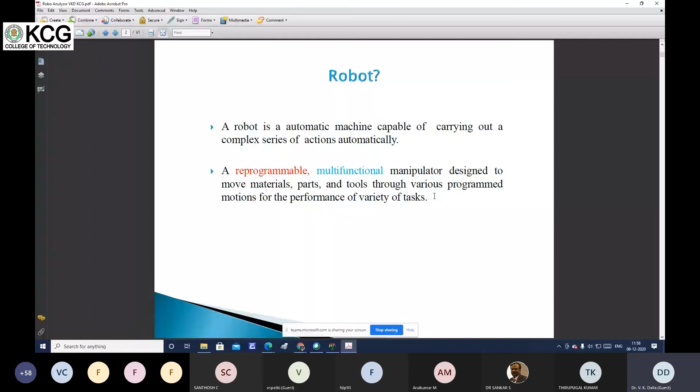Now, a little bit about the history of the term robot. The initial term was robota, taken from the Czech word meaning forced or slave labor. It was introduced in 1921 by Karel Čapek, a Czech playwright, in his drama named Rossum's Universal Robot, RUR. In this drama, the word robota was coined, and from there the evolution of the term robot began.

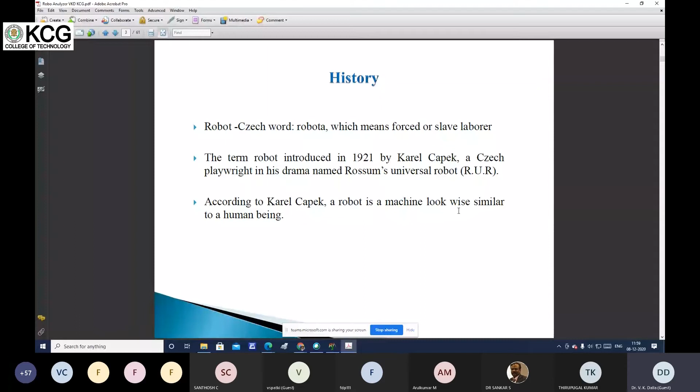According to Karel Čapek, a robot is a machine similar in look to a human being. There are three H's in robotics: hand, head, and heart. If we compare a robot with human beings, the hand is in the form of a manipulator, the head represents the intelligence part, and the heart represents the emotions of human beings.

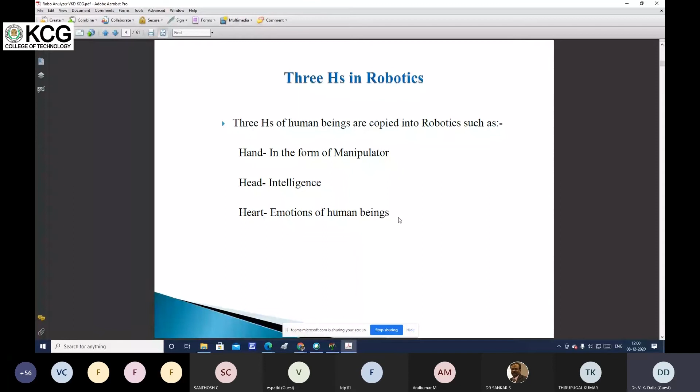What about safety? Human beings come first. A robot may not injure a human being, or through inaction allow a human being to come to harm, unless this would violate a higher order law. A robot must not cause harm to human beings under any circumstances.

What about the second law? It's regarding obeying instructions given by human beings. Under any circumstances, a robot must follow the instructions given by humans, but not in a way that violates the first law. Safety is the first concern.

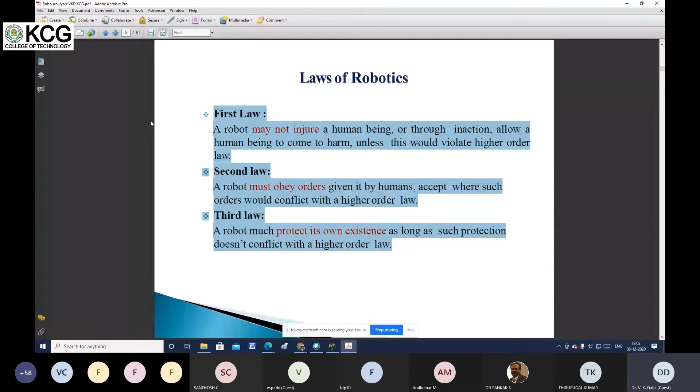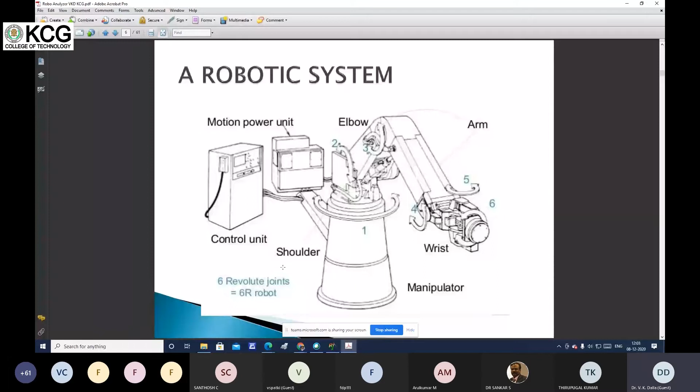Now I'm moving a little bit to kinematics, and the software RoboAnalyzer is for exposure to kinematics. In robot manipulator kinematics, it is written here as robot then manipulator, but in some books you will find it written simply as robot or as manipulator. Here it is written as robot manipulator, so there is almost no difference in some books.

In a book written by Professor S.K. Saha of IIT Delhi, manipulator is defined as the mechanical structure of the robot. So these two terms, robot and manipulator, are interchangeable.

What about kinematics? In kinematics, we only study the motions without considering the forces. The forces are the cause of the motion—forces in the case of linear motion, and torques in the case of angular motion. So in kinematics we study only positions, velocities, and accelerations. We don't study the forces required to move the manipulator, or the torques required to rotate the joints.

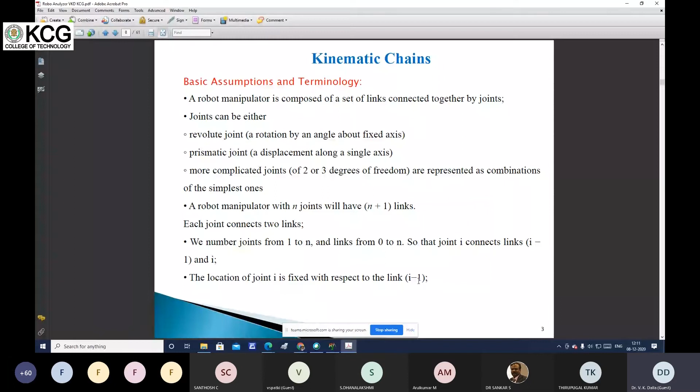That is. What about forward and inverse kinematics? We will visualize this by using the software Robo Analyzer, but we should know the basics of forward and inverse kinematics. So forward kinematics is where the values of the joint angles will be given, and what we have to evaluate is the robot tip positions. So in this, suppose the values θ1, θ2, θ3 will be given.

Suppose θ1 is 20, θ2 is 40 degrees, and θ3 is minus 30 degrees, like that. So these are the inputs. The joint angles are the inputs, and what will be the outputs? So our robot tip, this end effector. End effector either may be a gripper or tool. Here it is a tool. So these positions of the tool are the outputs in the case of forward kinematics.

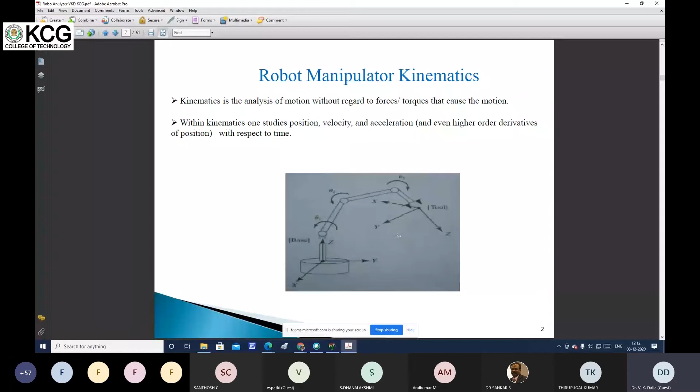What about in the case of inverse kinematics? In inverse kinematics, the output of the forward kinematics then becomes the inputs. And what were the outputs? The outputs were the robot tip positions. So robot tip positions, meaning x, y, z coordinates, will be the inputs here. And what will be the outputs here? The joint angles will be the outputs.

So what does it mean? To locate any object at a particular goal point, there may be possibilities of having more number of sets of the joints. In one set, all theta 1, theta 2, theta 3 will have some values. In another set, it will have some other values. Either all will have different values, or some angles will have different values.

So this is more practical. Inverse kinematics are more practical. Suppose I'm going to drink water. For that, this is my target point. So there may be multiple ways. Like I can grasp this like this way, I can grasp this like this way, I can go and handle this bottle like this way, meaning exactly. So this is more practical, just to drink water.

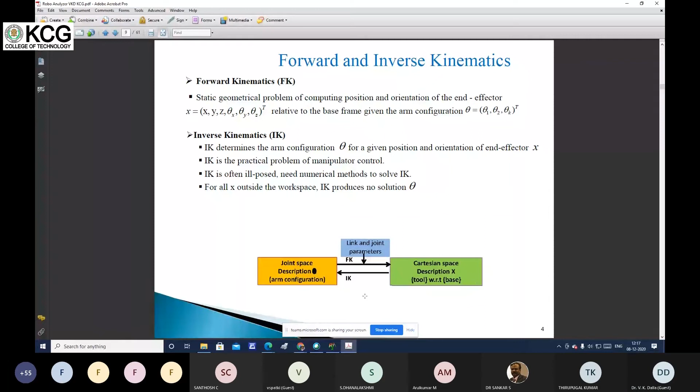This is the schematic diagram of robots. We are taking the example of planar robots because it is easier to understand; 3D may be difficult. Here is a 3 degree of freedom robot, and in robotics, firstly we should know what degrees of freedom means. Degrees of freedom means the number of independent variables which can completely describe the system.

The system here is the robot. In robotics, each joint is considered 1 degree of freedom. So how many joints are there? Theta 1, theta 2, theta 3. So we have 3 joints, meaning 3 degrees of freedom. A planar robot arm means we are only considering X and Y; the thickness of the robot we are not considering here, just for understanding.

As I told you, to give numbers we need to name all the links and all the joints. For links, we start from 0: link 0, then link 1, link 2, link 3. But what about the joints? Joints we start from 1, not from 0: joint 1, joint 2, joint 3, like that.

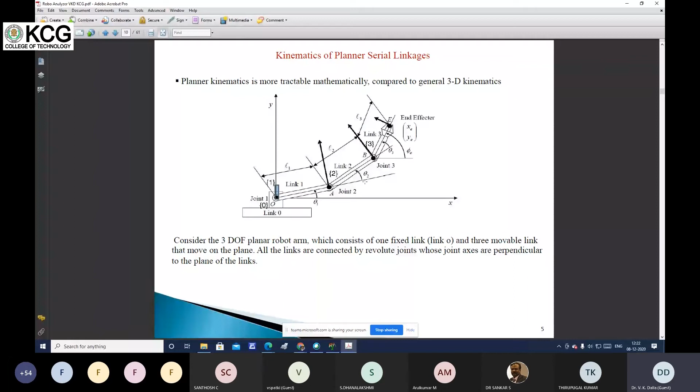Similarly for the x direction, we can get the equations where sin is replaced by cos. So it will be L1 cos theta 1 plus L2 cos(theta 1 plus theta 2), and so on.

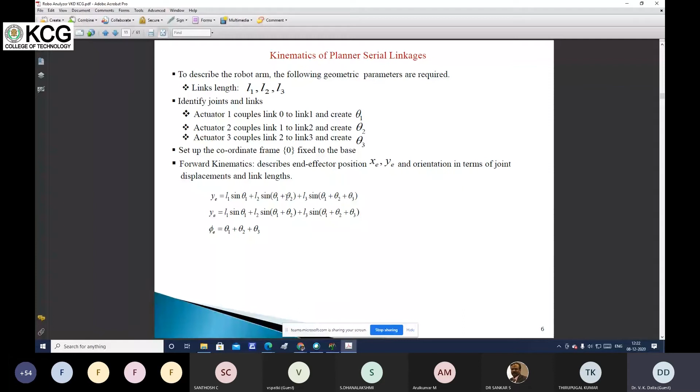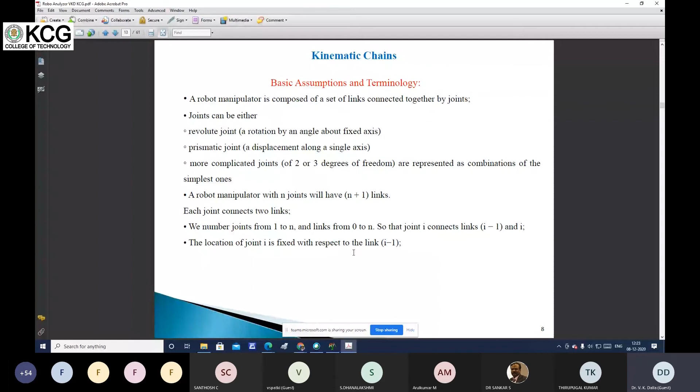This is only possible if we have extra degrees of freedom. If a robot has various configurations, meaning various ways to reach the goal points, then the robot is called a redundant robot. Redundancy is only possible if there are extra degrees of freedom. Our human body is the best example of a redundant arm - we have a number of extra joints, that's why we are more flexible and more capable.

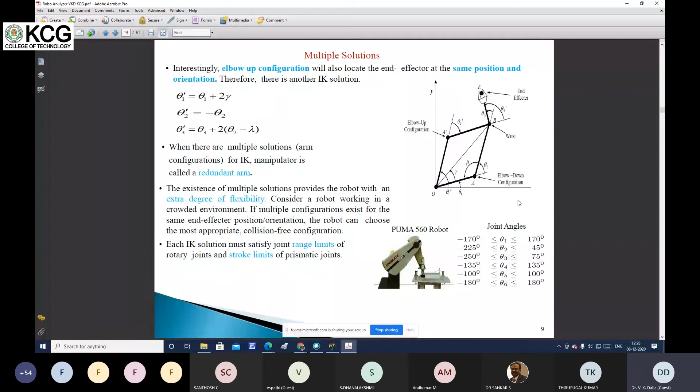Now, quickly, I'm moving to the DH parameters - better we cover this one, then come back to the previous slide. DH, the full form is Denavit-Hartenberg parameters - 4 DH parameters. And what are these parameters? These are alpha, A, D, theta. Alpha is the twist angle. A is the link length, like L1.

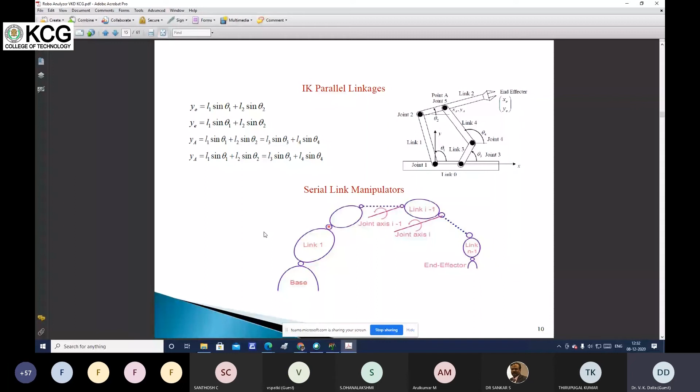Then likewise we cannot get the kinematic and dynamic equations easily for motions. With the help of computer science, those kinematic and dynamic equations are converted into the language of robots, the language of machines. But the basic thing, from where the codes come, is the kinematics and the dynamics. For a complex system or robot having multiple degrees of freedom and a combination of prismatic and rotary joints, we cannot easily get the kinematic and the dynamic equations.

The DH parameter is restricted to kinematics only. So ultimately why is it required, and how? This is the link description. For example, axis I minus 1 and axis I - this is the present axis and this is the previous axis. In between there will be a link.

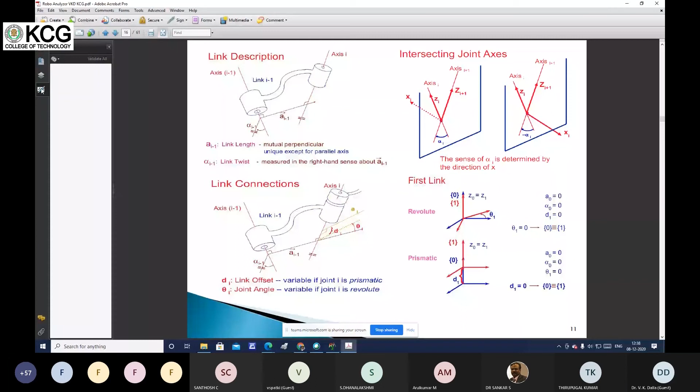This is the xi minus 1 axis, this is the xi axis - we want to make it parallel. So again we need to rotate the axis about some axis - by how much? By theta. Now it got oriented, but there is still some distance to reach, along the axis. Then we need to consider the prismatic joint, meaning D.

Ultimately the point starts from here and will reach here. So how many transformations are there? There are 4 transformations - firstly the twisting, second is translation. Twisting is a rotation, then translation, then again rotation, then again translation. But this translation is along the manipulator axis.

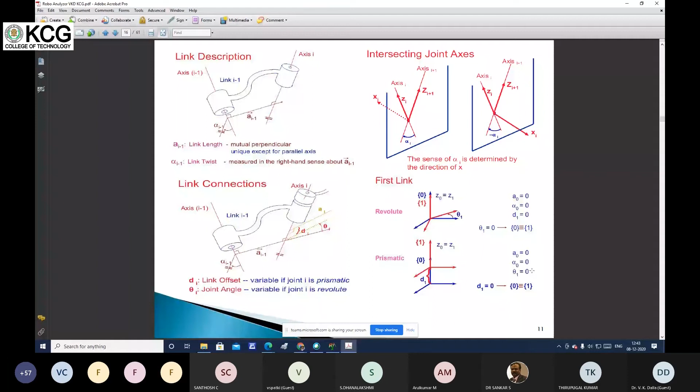Now let's consider the last link, with the same revolute and prismatic joints. See both axes - this is the previous axis, and this is the present axis. In between there is link length along the x-axis - that's xn minus 1 for this axis, and xn for this one. So what is the difference here? This xn got rotated by theta n. Similarly for the prismatic joint.

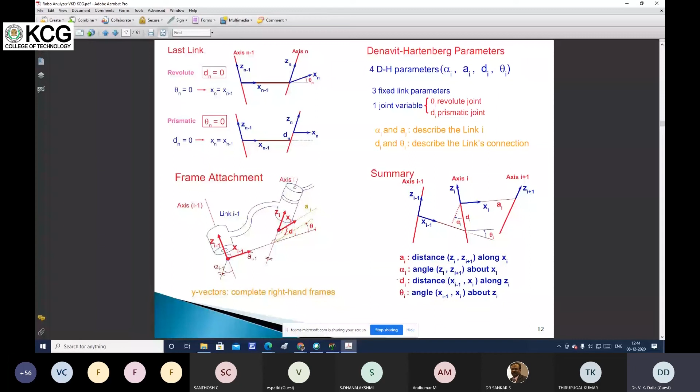So ultimately, why are we doing this? Our purpose is to get the positions of the robot tips. We want to locate objects accurately at the defined points, at the goal set points. For that we want to analyze - that analyzing we are going to do here. So ultimately, with the help of all 4 configurations, we get this. See here, this transformation is for one, this is for another, this is third, this is fourth. There will be 4 matrices, and we need to multiply all matrices, then we will know about the robot tip positions and orientation.

So this fourth column - the 3 elements will denote the robot tip positions. This a I minus 1 is equal to x, this one is equal to y, and this is equal to z. What about this 3 by 3 matrix? This is the rotation matrix - it tells the information about the orientation of the manipulator.

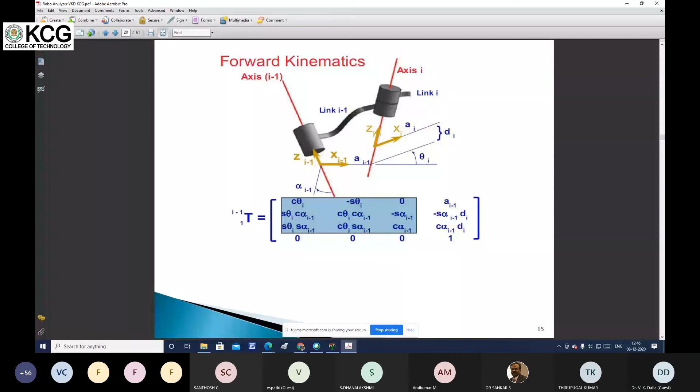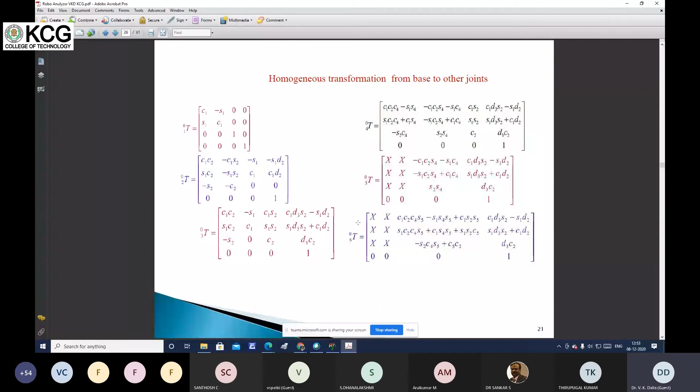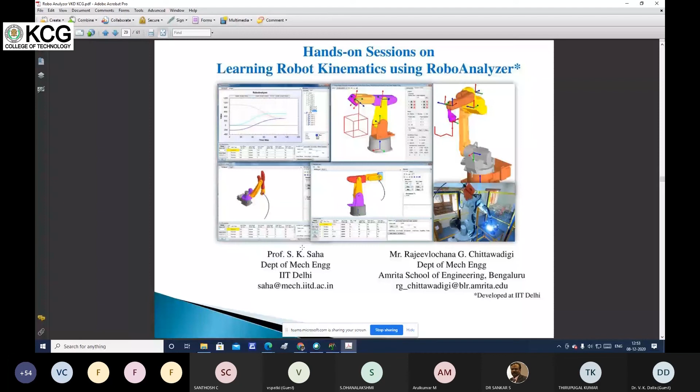Now coming to the Robo Analyzer part, the software is developed by Professor S.K. Saha and his team. What are the important contents? It is for robotics education: homogeneous transformation matrix, 4 by 4 matrix, DH parameters, forward kinematics, inverse kinematics, motion planning.

What are the applications? Applications are not only limited to industrial use now. It can be used in industries, academics, research, entertainment, like the robot movie of Rajnikant, part 1 and part 2, and for medical applications. And now it is being included in the UG syllabus.

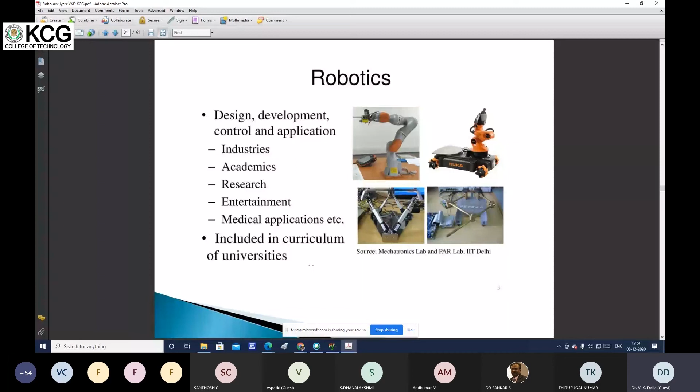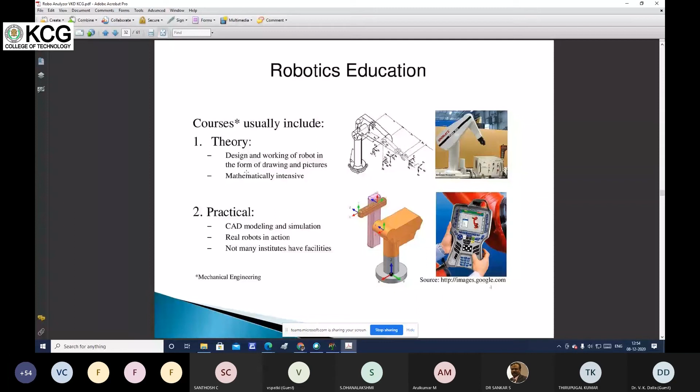Their courses are being included, theories and practicals. Why not switch to the software now? So, it is a priceless software, meaning freely we can access and download it.

How, from where can we download it? Go to Google, type Robo Analyzer, then it comes up. The website is www.roboanalyzer.com. If you click, a window comes up.

Now see the left part, here, Home. What is this? Robo Analyzer is a 3D model based software that can be used to teach and learn robotics concepts. It is an evolving product developed in the Mechatronics Lab, Department of Mechanical Engineering at IIT Delhi.

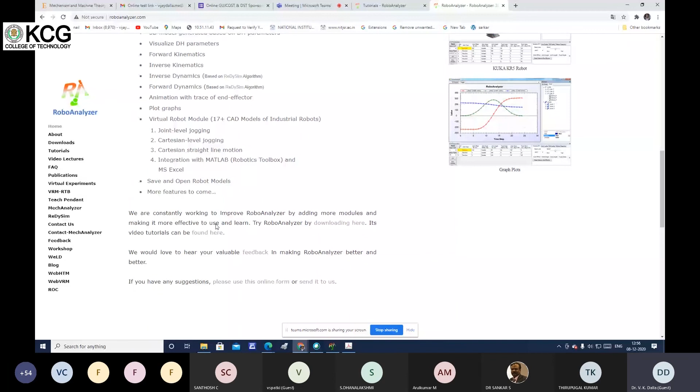So a little bit about its features. There are a number of versions that can be seen by clicking downloads. See the version, now the latest version is V7.5.

What are the system requirements? These are the system requirements. By having these kinds of specifications, you can use this software. You can easily download it, and these are the features added in the new versions. In this version, the homogeneous transformation matrix module is added.

There are some tutorials, video lectures, frequently asked questions, publications, virtual experiments, and some mechanical analyzer. There are some more softwares by clicking this: dynamic, ReDySim, Mech Analyzer. This Robo Analyzer is only for robotics, and Mech Analyzer here is for some mechanism portion.

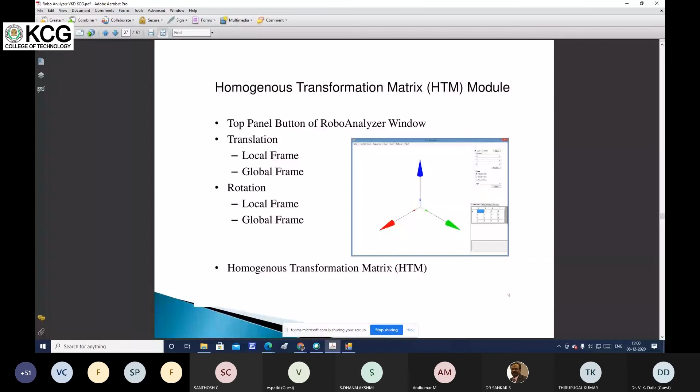This panel, the top panel, this window comes in this Robo Analyzer software. See the last column is for the coordinate systems, in x, y, z directions.

Okay, now rotations. This 3 by 3 matrix shows the rotation.

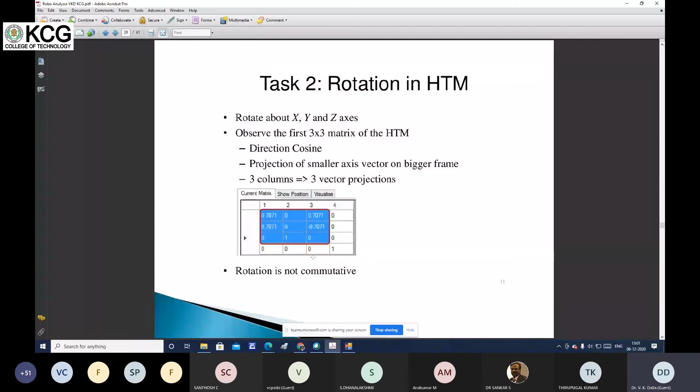Now the difference between local versus global in HTM. So current transformation, what does it mean? Current transformation is the multiplication of individual matrices.

But local transformations, what we have to do means: this is our absolute frame, and this is my mobile frame. Suppose there is a local frame. Whatever transformation will be there in the local, what we have to do? We need a number of matrices, but we need to multiply them in a sequence. Suppose after this, whatever transformation happens, we have to post-multiply.

But in the global, what we have to do? If we consider the previous absolute frame, then we need to pre-multiply.

Similarly, rotations also we can see by rotating. Suppose on the x-axis, I'm putting values, 10 degrees. Suppose I'm putting larger values, 50. Now see the rotation about the x-axis, and this is our x-axis.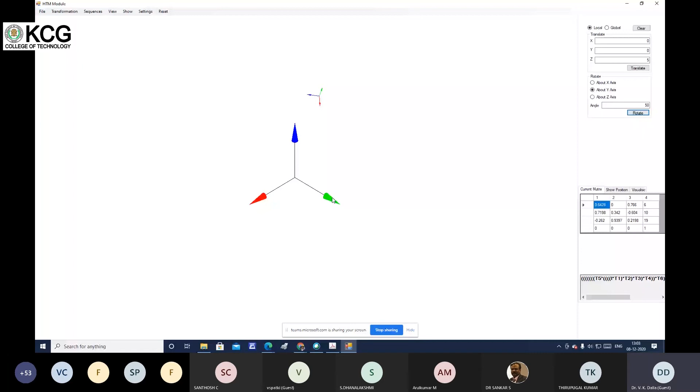Now rotation about the y-axis. See, rotation about y-axis, this one in green color. And rotation about z-axis: now this z-axis is fixed, and the rotation is about that axis, while the other axes are being rotated.

See, you might be observing changes in these matrices. If you change values of x, y, z in Cartesian space, the values in the last column will change. If you change the joint angle values, the rotation matrix and positions will change. One can observe this. Suppose I'm putting x some values, suppose 30. Now what are the changes happening in this matrix?

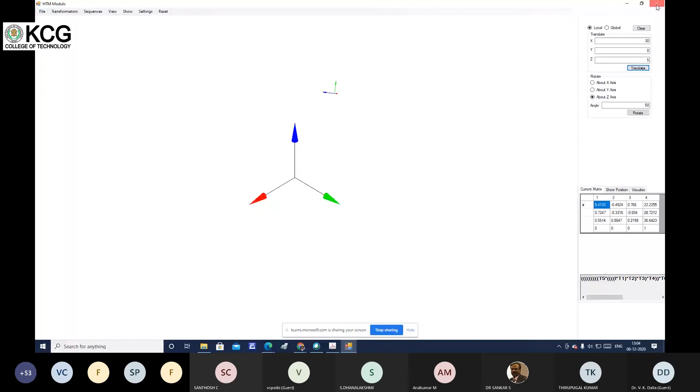So there are two applications: one for visualization of coordinate systems, and now the RoboAnalyzer, which is a 3D visualization of robots. So this window, see what are the things here to explain.

See here, below the DH parameters. The default robots are those provided by default in this software, with 1 to 7 degrees of freedom. And what about the types of robots? Select a robot like two prismatic, two revolute, prismatic-revolute, revolute-prismatic. So this is what it is.

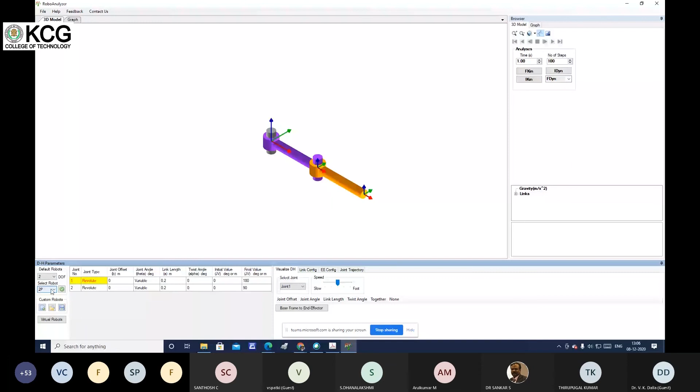See, two revolute. 2 degrees of freedom means two revolute joints. Now we have to visualize.

Similarly, if we increase degrees of freedom, like 5 degrees of freedom, and take a robot, say one prismatic, then again prismatic, 3 prismatic joints and 2 revolutes.

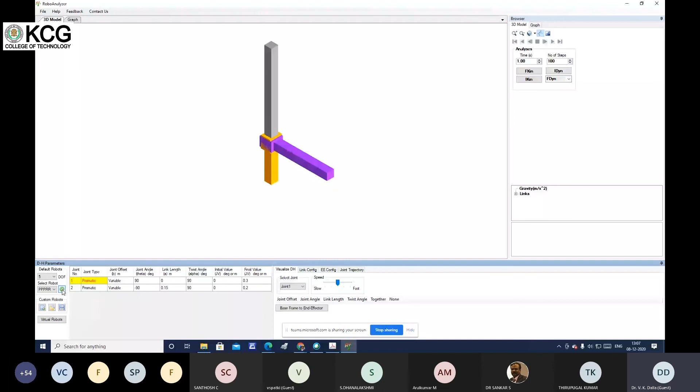Now we're going to visualize, we're going to load the selected robot. Okay, we are going to load it. See, according to this, the DH parameters got changed, depending on the number of joints, 5 here in the default robot with 5 degrees of freedom. So joint numbers are 5, and of the joint types, 3 joints are prismatic and 2 are revolute.

And what about the joint offset? So the prismatic joints in this case will be variable, and the joint angles, these are the joint angles, and the link lengths. Also we can change the link length.

Suppose the joint 2 link length, we are going to change it. So you can visualize how to change it, suppose we want to.

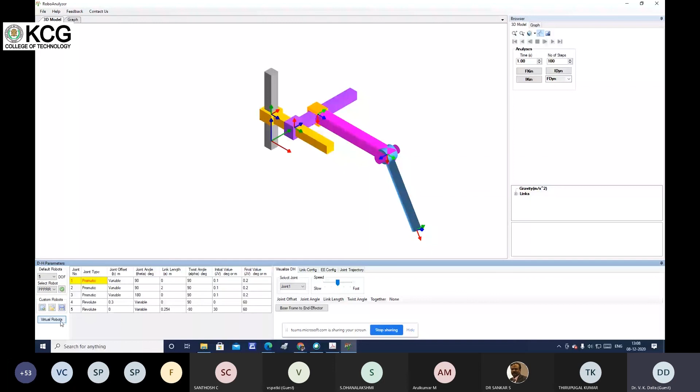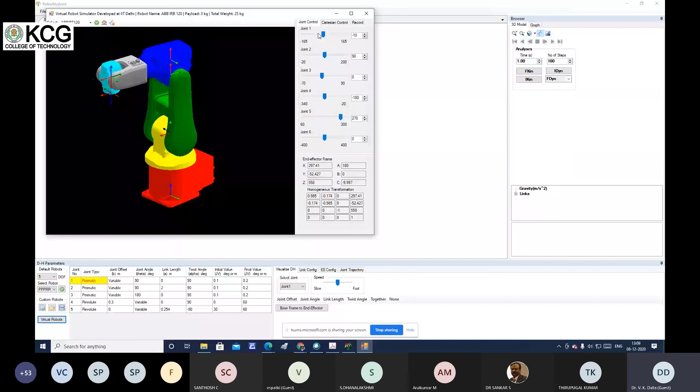It also comes here in another window. Now we can jog the joints, meaning we can change the joints, and we can see the motions in this window. I'm moving joint 1, then see.

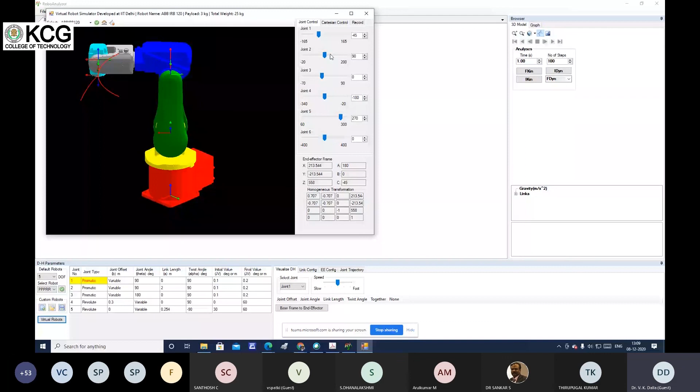This joint just near the base is rotating. Now this joint 2 is rotating. Now joint 3 is here.

What about joint 4? Where is joint 4? See, in this way one can visualize it by jogging the joints. Now I am rotating joint 5 and joint 6, and see the changes in this homogeneous transformation matrix. Just observe it, what is happening.

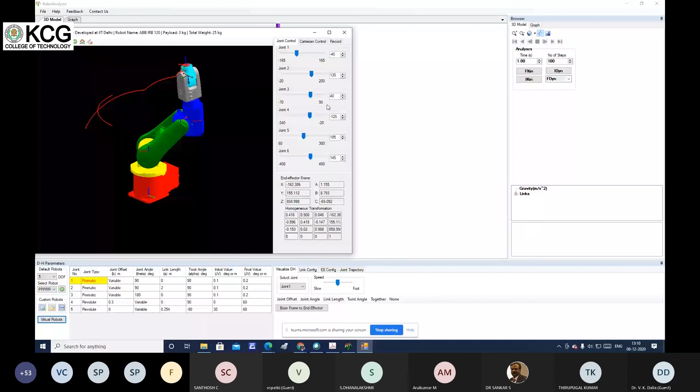Now these are the default robots, but also we can access saved ones, like I'm accessing this one. You can also access your own robot if you have a model.

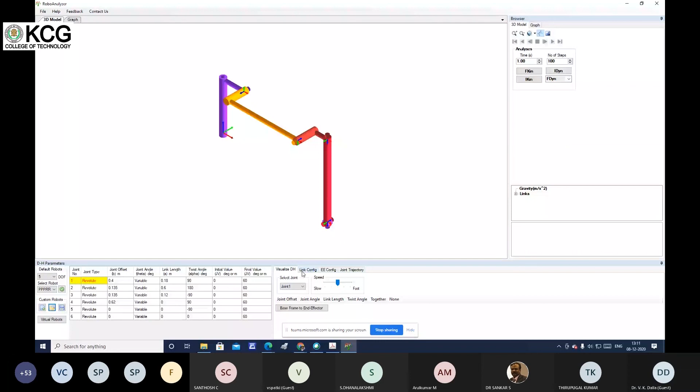See the right side link configuration, and if you update, values will come here. We are talking about joint 6. In this way you can observe joint 2 similarly, and what values there are. What about the end effector configuration? Yeah, this is the end effector configuration, and the same homogeneous matrix it comes.

What about the joint trajectories? Meaning which kind of pattern we are going to follow, either cosine or something else, like cycloidal or cubic.

Now, forward kinematics, and I told you about forward dynamics and inverse dynamics. So now we are going to analyze, the kinematic equations are now written here, and we are going to visualize it by playing it. Now see the motions.

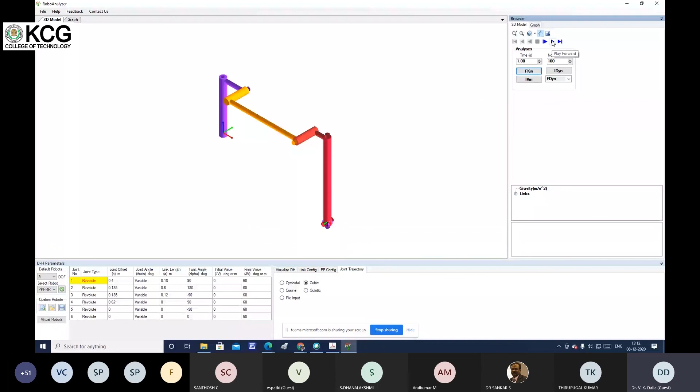Okay. So this is about forward kinematics.

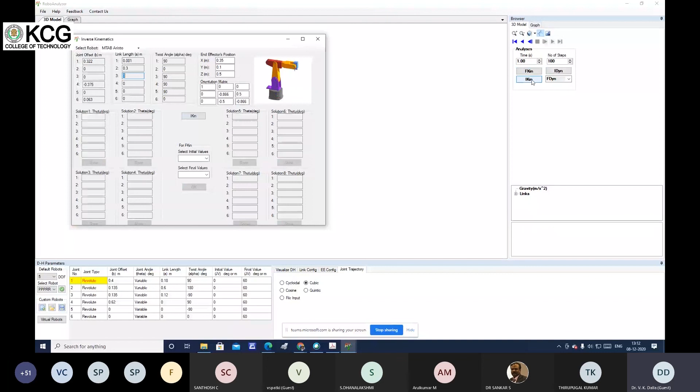What about inverse kinematics? If I click this IK, I will have the number of solutions. As I told you, in inverse kinematics we will have multiple solutions to reach the goal points. Suppose these are solution 1, solution 2, solution 3, 4. How many solutions are there? 8 solutions are there, and these are based on the inputs. The number of solutions depends on the inputs, which are the twist angles, joint offsets, and link length.

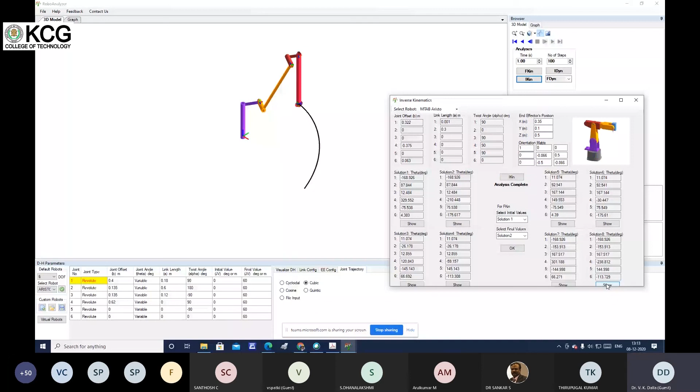Now I am taking solution 8. It will show on this window. If I take solution 8, the goal point and the end effector positions and locations are the same. Suppose now I take solution 4. See the changes.

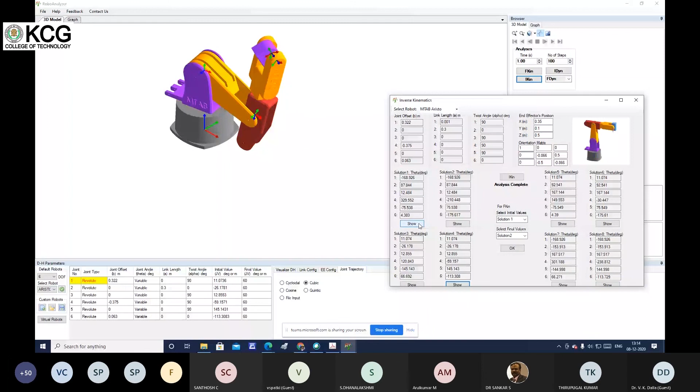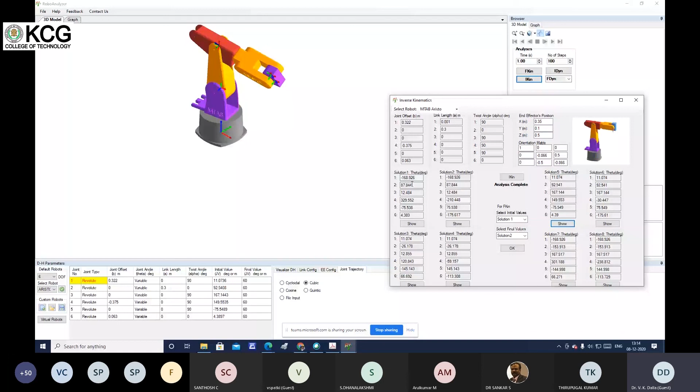Solution 5 I am taking. Also, here we can select the initial values. Suppose I have taken solution 1 as initial values and solution 2 as the final values. Then see what is happening. Instead of solution 2, I am taking solution 8. Now observe this 3D model. What is happening with solution 8? No more changes. And now solution 5, suppose solution 5.

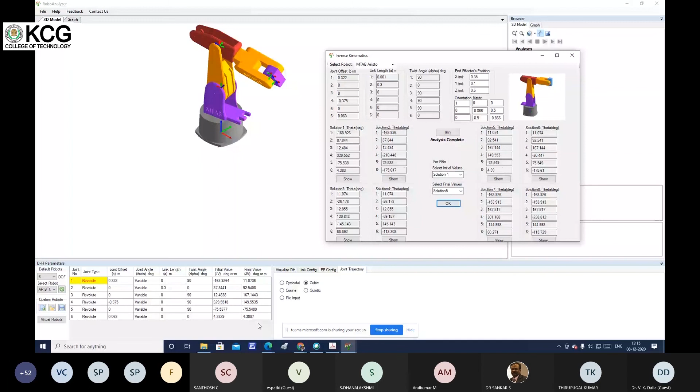This we can observe here in the DH parameters. These are changing. This is one way. Another way, by this graph, we can analyze.

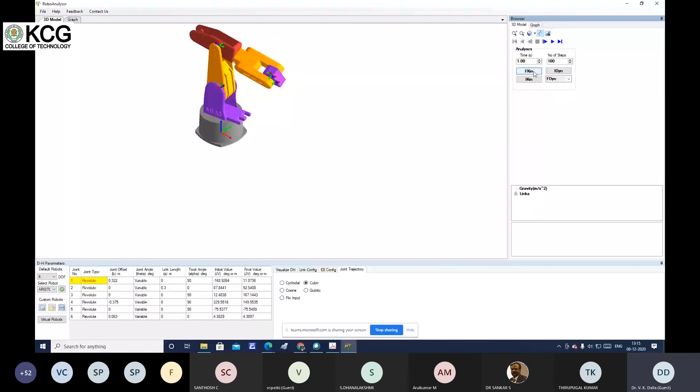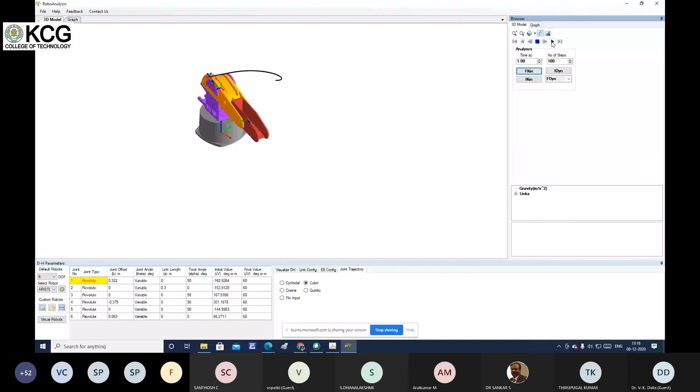So once again, we need to take forward kinematics or inverse kinematics, suppose inverse kinematics. Now in forward kinematics, I want to see the motions. We can visualize this by this graph. The joint 1 values. See, here we are not getting the forces because we are only doing kinematics.

See what are the values of these joints. I'm minimizing this. Only joint 1 I'm taking. Suppose we want to know about joint 4. So this is the value of joint 4.

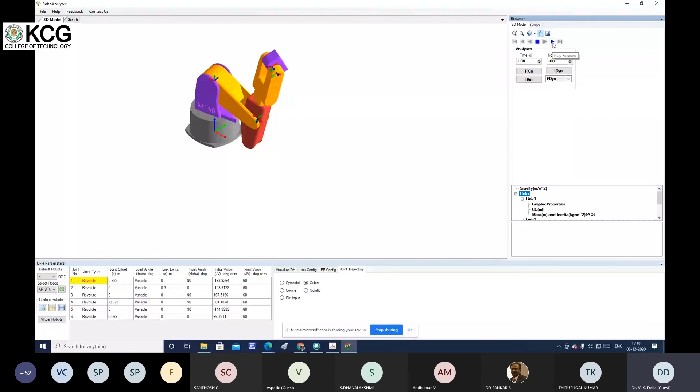In this way, for visualizing the dynamics, what we have to do: firstly we need to analyze the forward kinematics, then forward dynamics and inverse dynamics. Whenever we are going to visualize the dynamics, we put in values of masses and center of gravity. Then it will tell about the results. With the help of the graph, we can know what were the forces and torques.

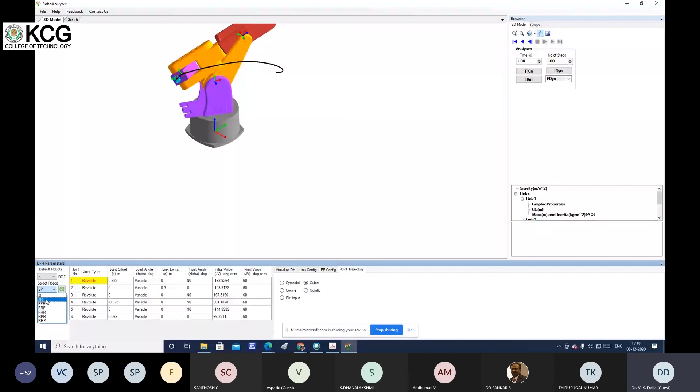This also we can visualize. Why not take a simple robot, a 3 degree of freedom, 3 revolute joint robot. Now forward kinematics, then inverse kinematics, and then I am playing this. It is easy to understand.

Now I want to visualize this with the help of this graph. So these are... I mean, sir, these values will come here, the forces and the torques. Only if you take kinematics, then we cannot observe that.

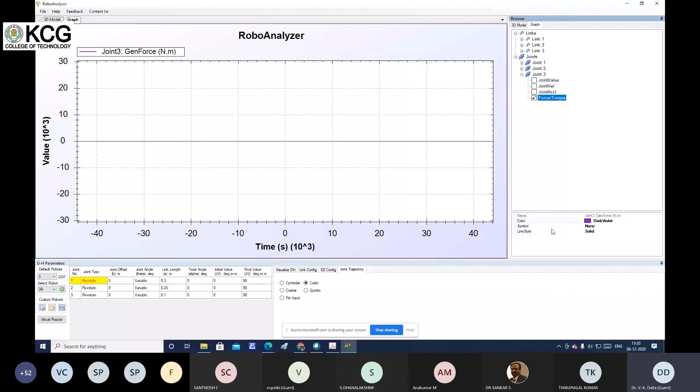Like suppose joint 3, we want to know about force. Values I think we have not selected. Values, what other values? Like link 3 mass. Yeah, it's there, but in this way one can, it is not a big problem. By this graph, one can get the value of torques or forces.

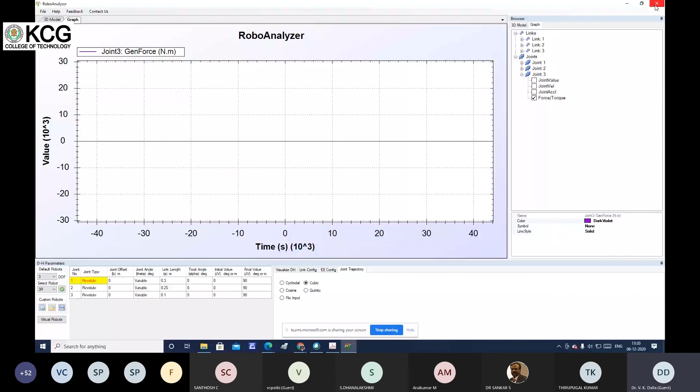Also, one can interface MATLAB. The MATLAB code can be visualized here. And this is also not only limited to robotics. It can be used for other purposes, like for knowing a mechanism, for visualizing mechanisms, we can use this.